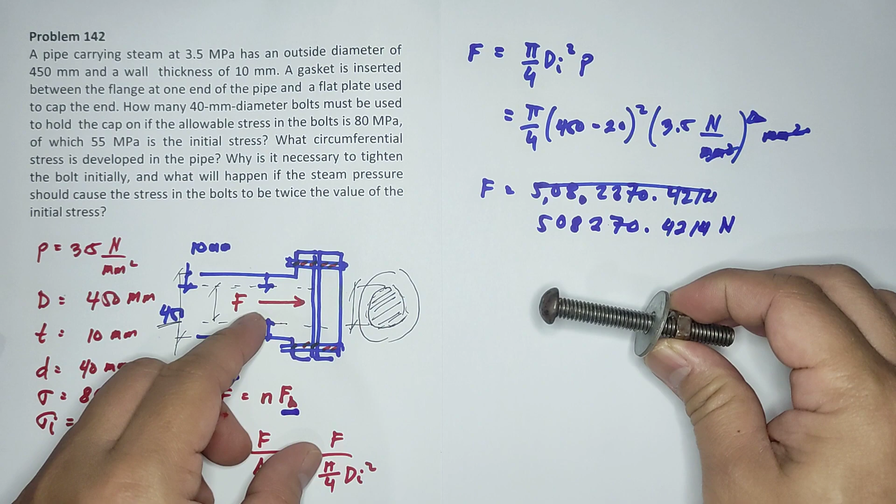So, ang nangyari, kapag tinulak niya yung force na to, magkakaroon ng tension. Alamin natin yung capacity nito. Yung capacity niyan, sabihin na lang natin, in terms of tensile stress, yung allowable niya ay 80 megapascal.

So, mag-base tayo dyan. Pwede natin makuha yung maximum capacity na force ng bolt. That is, area is pi over 4, the diameter of the bolt. Malalaman natin yung F max. So lumalabas na F max is 80 megapascal, that is Newton mm squared.

Then pi over 4, the diameter is 40 mm, so squared siya. So lumalabas na ang maximum na kaya ng bolt in terms of force ay lumalabas na 32,000 pi Newton. So yun yung kaya niya.

Pero lumalabas dito na initially, meron na siyang, na-stress na siya ng 55. So, definitely, itong 32,000 pi Newton na ito, nakuha na ng initial tension mo na ito. Meron ka ng initial stress. Ano yung value na yun?

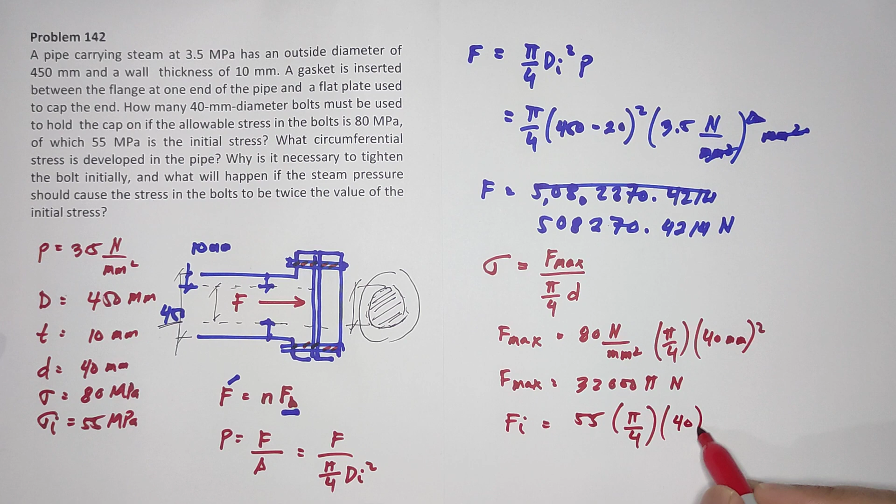Pwede mong computein. Yung force na yan ay pwede mong gamitin ito, kaya lang, sabihin natin initial, that is 55 megapascal times pi over 4, times 40 squared. So, yung initial tension mo sa bolt ay lumalabas na 22,000 pi.

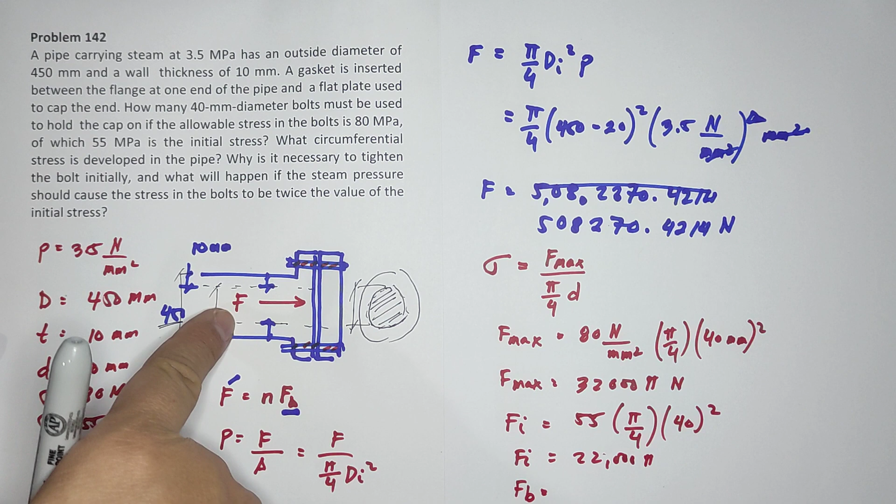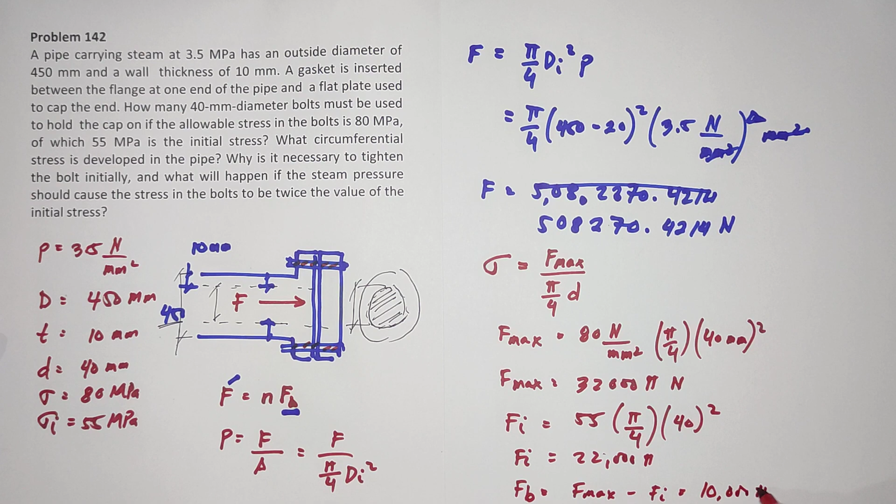So yung kaya na lang, ibawas mo itong initial na to, yung kaya na lang ng bolt na force para i-absorb itong force na to due to the pressure ay F max minus Fi, and that is 10,000 pi Newton. Okay? So with that, balik tayo dito.

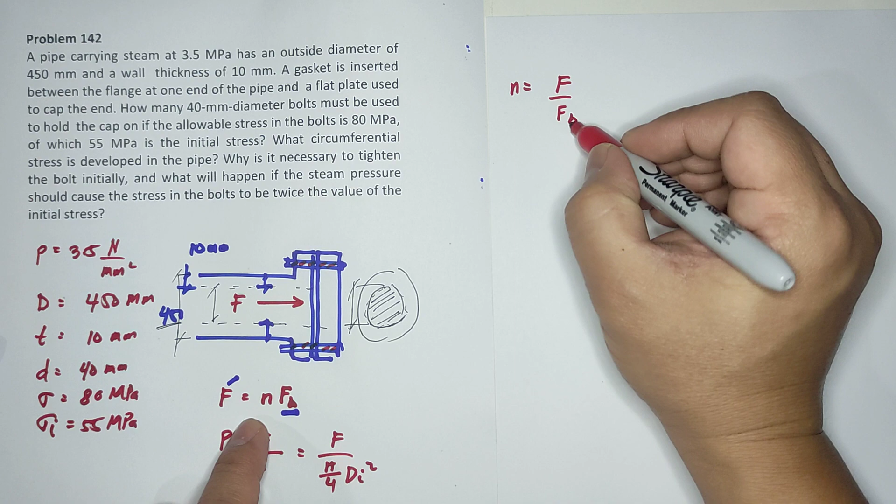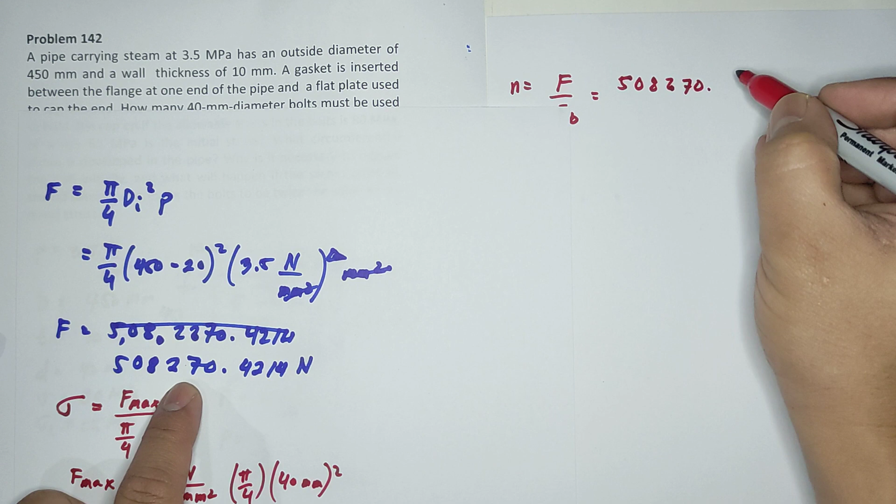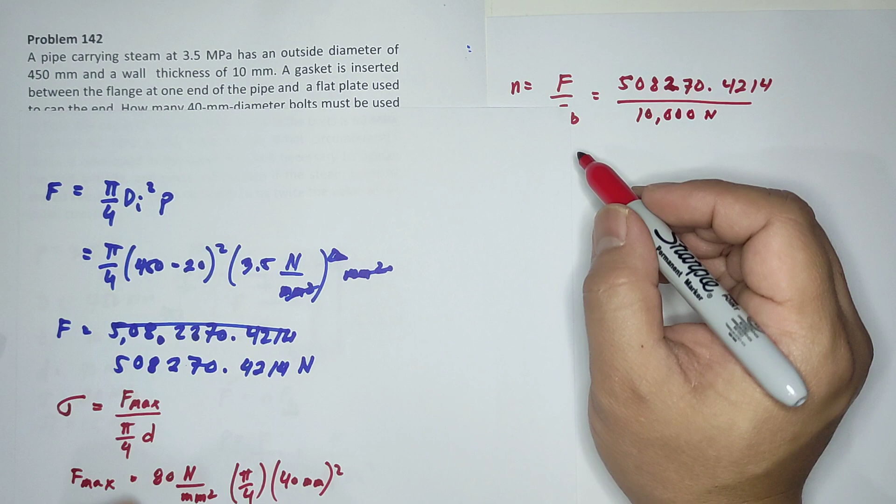So meron na tayong FB. So yung N na natin ay N from here, that is F over FB. Yung F natin kanina na nakuha ay 5,082... 70.4214. So, this is 2. Divided by 10,000 pi. Lumalabas na number of bolt ay nasa 16.

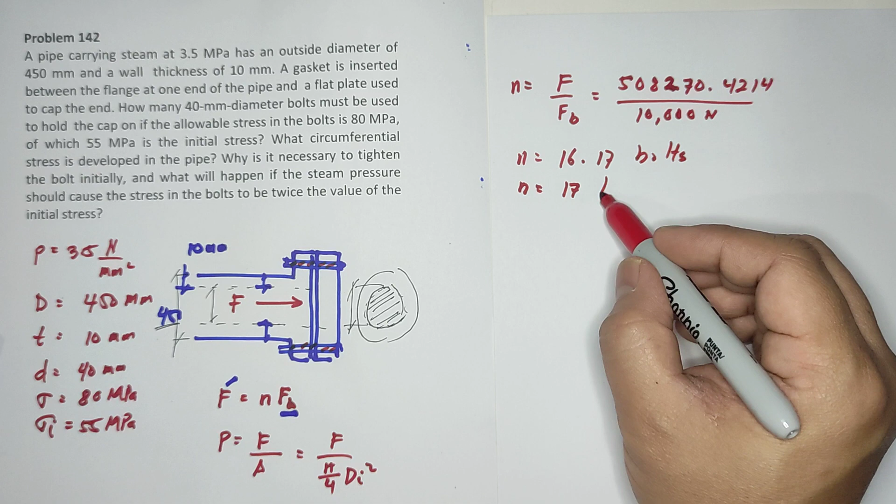Number of bolt ay 16.17. Pero take note, wala naman 16.17 na bolts. So, dagdagan mo na lang, i-round up mo, para sigurado kang hindi mapuputol yung mga bolt. Kailangan mo ng 17 bolts para hindi masira yung mga bolt na ilalagay mo dito kasi ito yung kanyang pressure. Kailangan mo ng 17 bolts para kayang-kaya yung pressure na nandito na 3.5 megapascal.

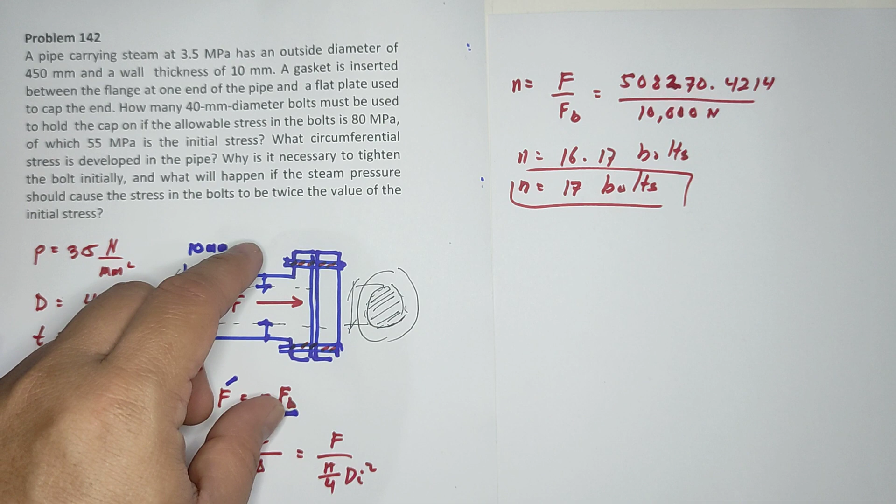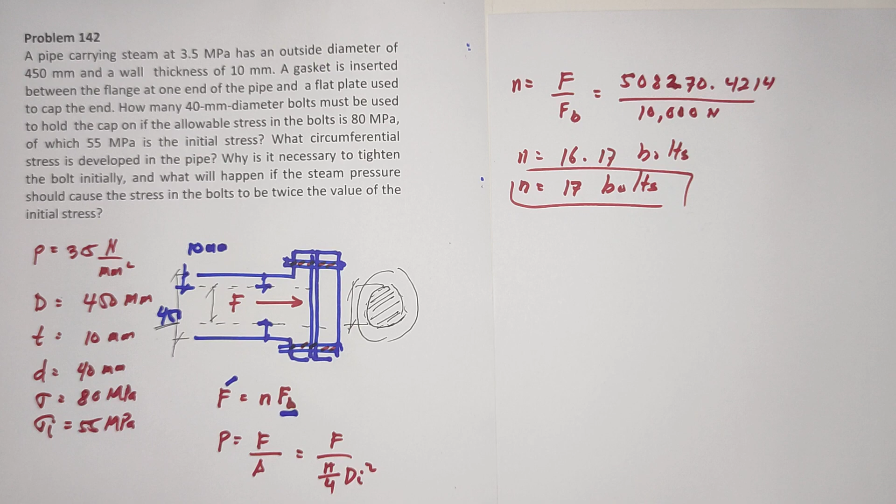Ngayon naman, what circumferential stress is developed in the pipe? Yung circumferential stress natin, ang equation natin dyan na na-derive ay, circumferential is, that is also tangential. So, PD over 2T. Yung P natin is 3.5.

That is Newton. Medyo ingat kayo sa unit. Then, the diameter should be inside. So, this is now 430, sorry, not squared. So, mm divided by 2 times the thickness na 10 mm. Lumalabas ang tangential stress mo ay nasaan na yun?

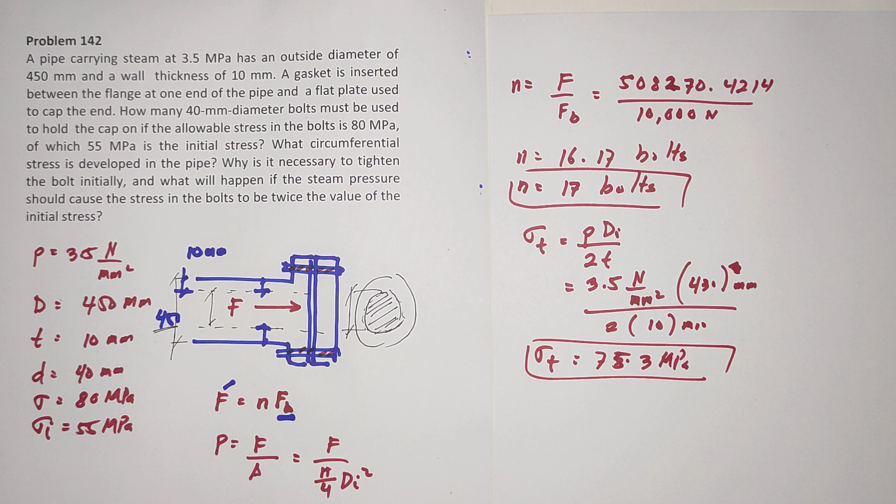Lumalabas na 75.3 megapascal. So, yan yung letter B. Yan yung tangential stress. Nasaan yung tangential stress?

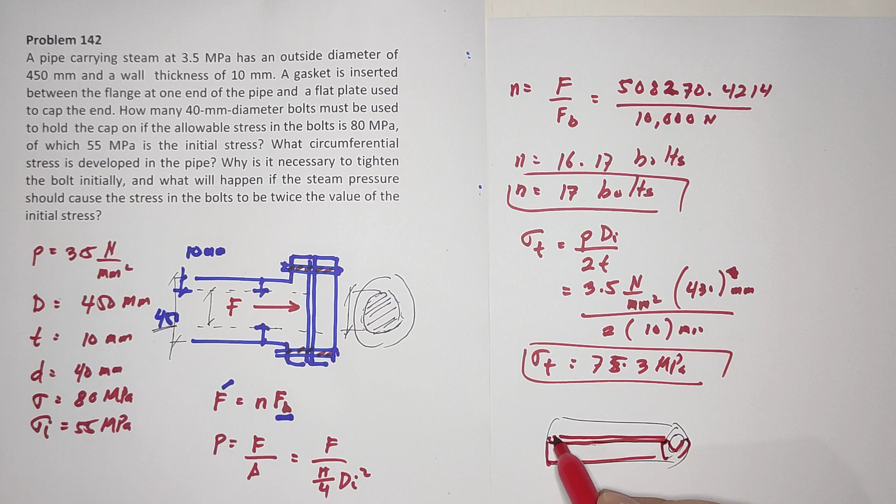Kapag ito yung pipe, halimbawa, ganyan yung pipe. Tangential stress, ikakat mo dito. Mangyayari, itong part na to, nakaka-experience ng tangential stress. At ito yung kanyang value.

Now, why is it necessary to tighten the bolt initially? And what will happen if the steam pressure should cause the stress in the bolt to be twice the value of the initial stress? Unang-una, tinatighten mo yung bolt para hindi mag-leak yung steam. Kasi kapag loose yan, siyempre may leak. Kapag na-tighten mo, may ipit yung gasket, so hindi na lalabas yung steam. Kapag in-increase naman yung pressure, pwedeng ang mangyari, lalo na kapag 17 bolts lang.

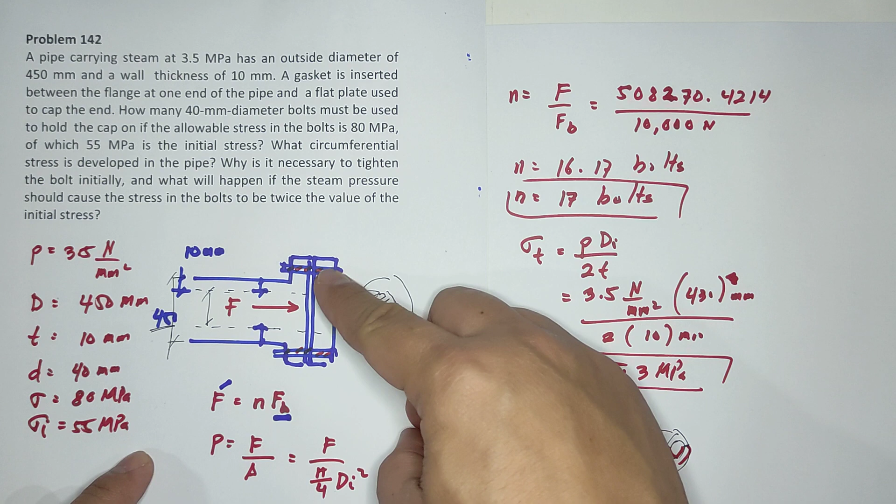Ang mangyayari, masisira na yung bolt. Dito, ang assumption natin, hindi pa natin pinag-aaralan yung stress na nararanasan ng plate na to. So, that is problem 142.